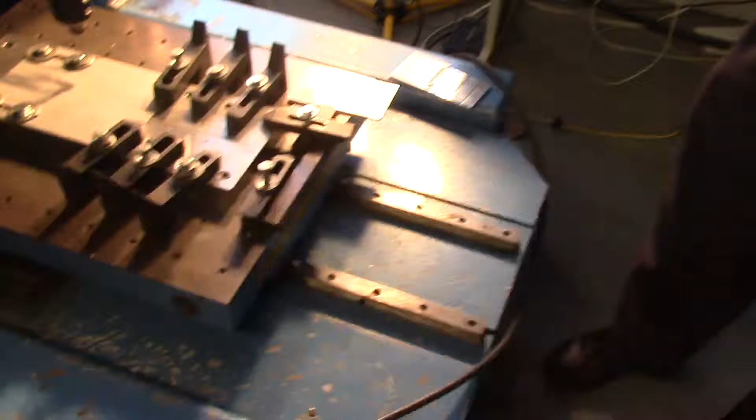The most important thing in the welding: you have to be sure that the center of the pin is the same as the center of the weld. How can we ensure that we put, set, or fix the workpiece or the test specimens in the same line as the center line of the pin or the tool?

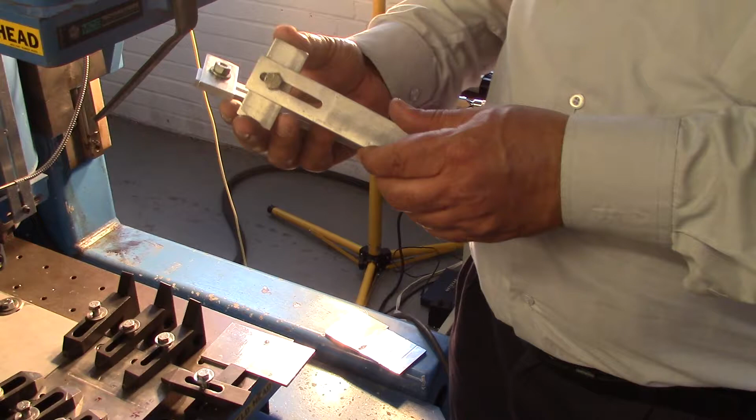Actually, we arranged to fabricate 2 jigs, flexible jigs. They can be moved by this bolt, and we adjust them with a distance. This distance will help us to put the workpiece in the same center line of the pin. We can do it now.

Also, we actually use a stopper here. This is the stopper, because the axial force is very high, and the fixtures will not be able to get a precise or adequate fixing force without putting some stopper. So the stopper will prevent the workpiece from moving along the welding direction.

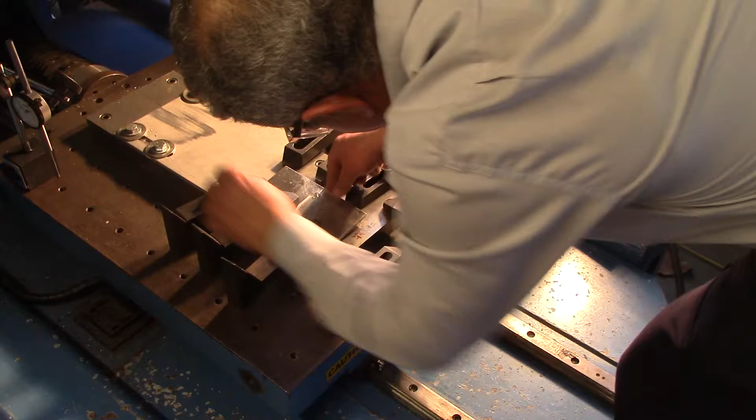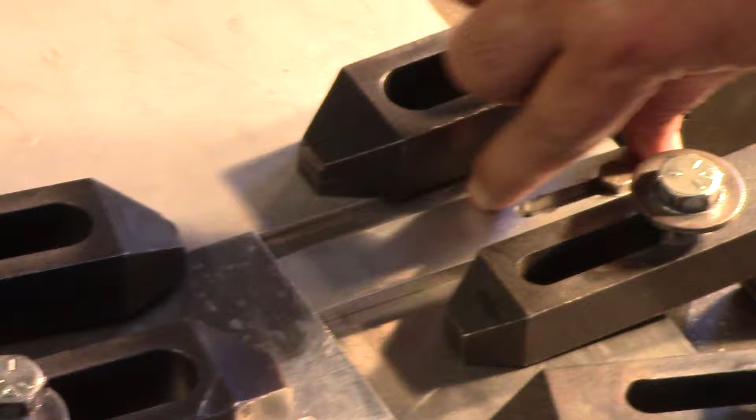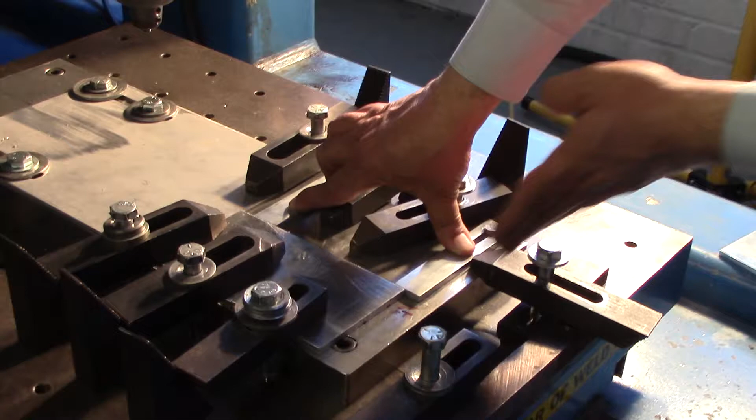You can see, you can put these 2 jigs here. They should be perpendicular with this face. This is the back face, and we have to put these 2 pieces together perpendicular to this. So we have to move this to be in touch with both jigs, and move the workpiece to be in touch with the stopper.

This is the correct position that will make sure this line is the same line as the center of the pin. Now we can go ahead with clamping.

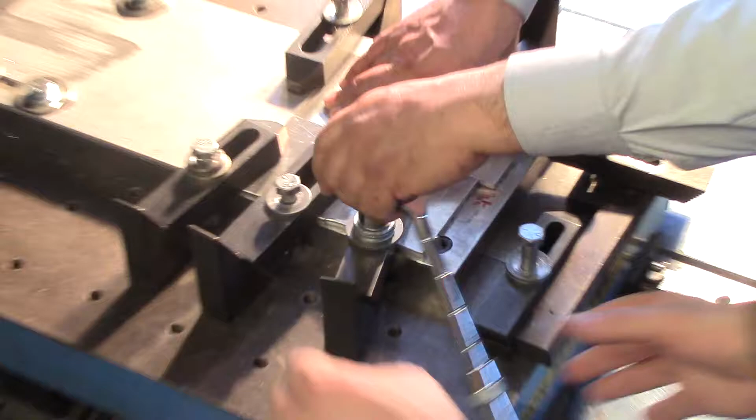Help there. Just let me see this. Do you want to... I need to move it. Yeah. Yes. Now? Yes. Oops. It's okay. I thought the one from there had moved actually, but this one.

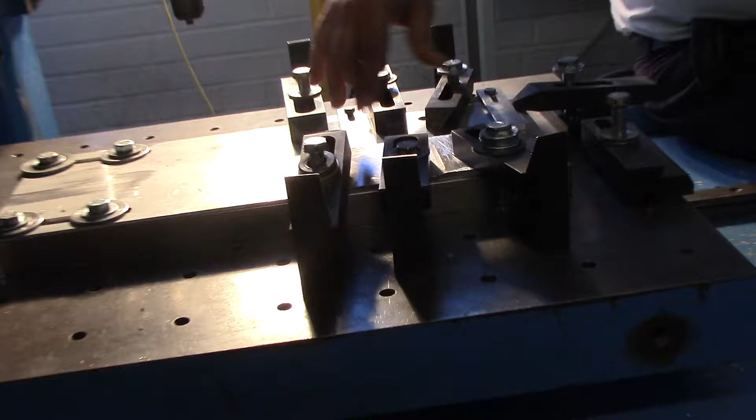So you can see the stopper thickness is less than the workpiece thickness. This is the advantage of the stopper. So we need to make a fixation on the workpiece and not fix the stopper.

Good? Yes. So you can use this. Yeah, it has a bunch of burrs. Oh, sorry. Oh, sorry.

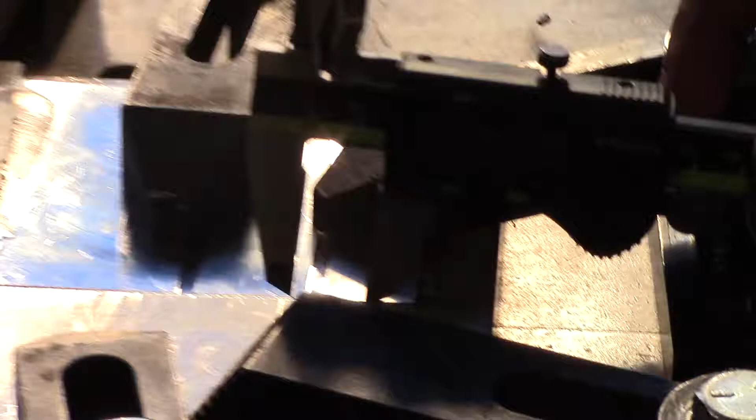So the start point is here, and we can see what travel we need. So it's 5.2 inch. Starting from this point, the travel will be 5.2 inch.

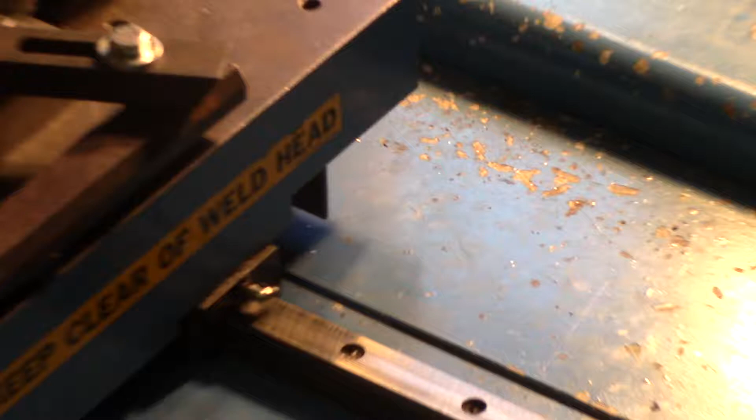The best thing for this, you have to do a test run with a safety margin. This is the first time we found this trick in order to use the friction stir welding in the air, or say a dry test. For the dry test, we have to make a trick on the machine. We have to give it the impression that the 0 point is not on the real surface.

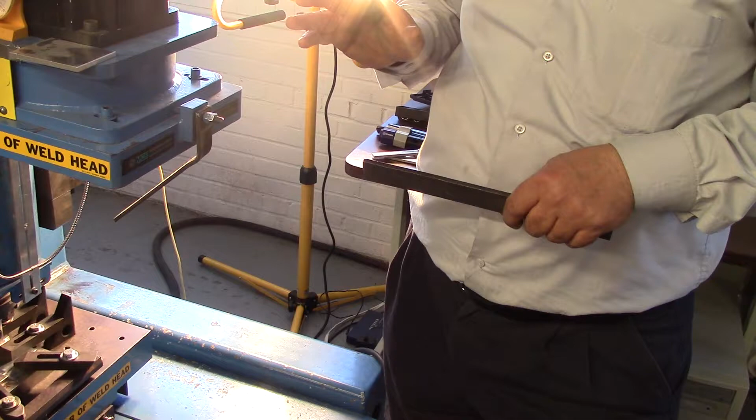So we have to put a spacer, then we make a 0 on the spacer, then we release the spacer, so the machine will get the impression that the 0 point is on this point, not on the real point. So we will be sure that all the tests will be done in the air without any interruption or anything unexpected during the welding, because we are not sure that the movements, the commands, are correct. So we have to be sure everything is correct by using a dry test.

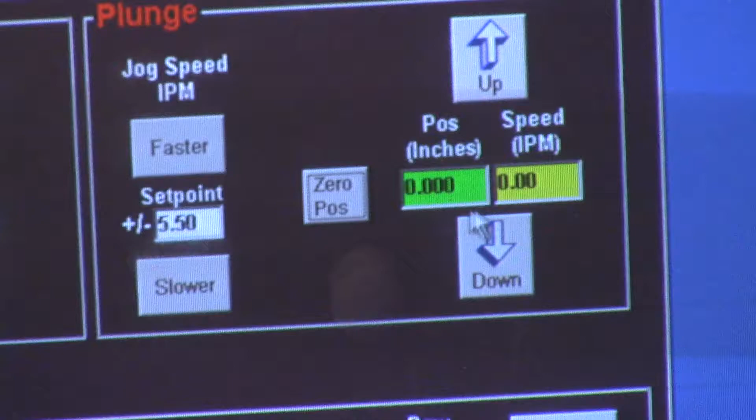Yeah, this is okay. So here we have to make a 0. To make a 0 for set point, you have to push 0. So the readings set to 0, and we have readings here, and we have to set it to 0 position. So we got a 0 as well. So we got a 0 for x-axis and z-axis.

Then, after finishing this step, we have to go to another step. This is a schedule sheet. What's the program name, job name, weld name? Let's say weld name is Hazen. April 11, 2004. So it will be okay. We have to select one of these and we make amendments on these templates. So I prepared this program previously with these movements. We can make edits.

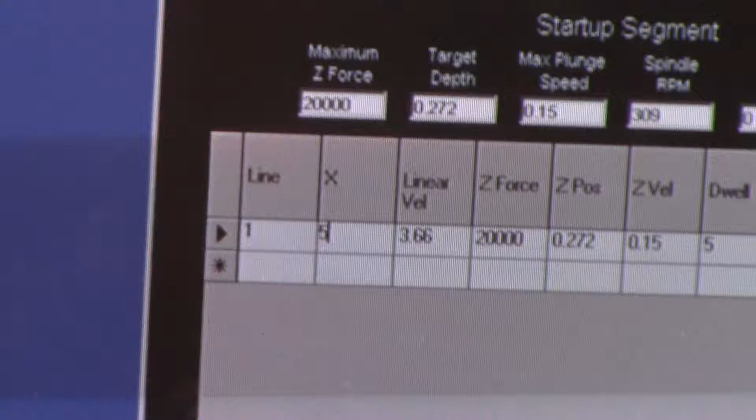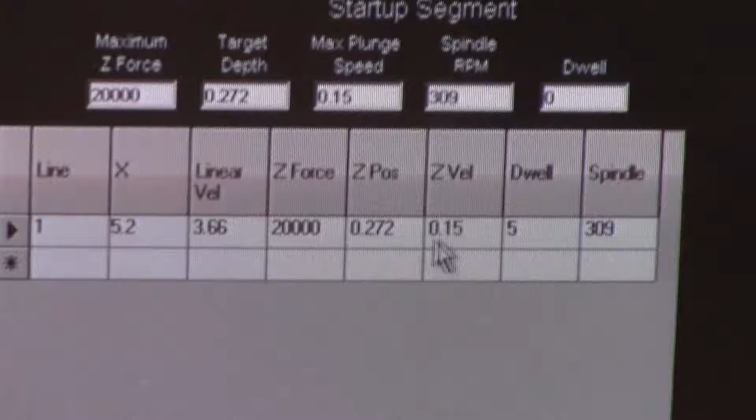So we got this screen. The travel axis now is 6.3. What is the inches? Yes, we measured it as... Is that the length of the weld? Yes, we measured it as 5.2. The linear velocity is 3.66 and Z position is 0.272 and Z velocity is 0.15.

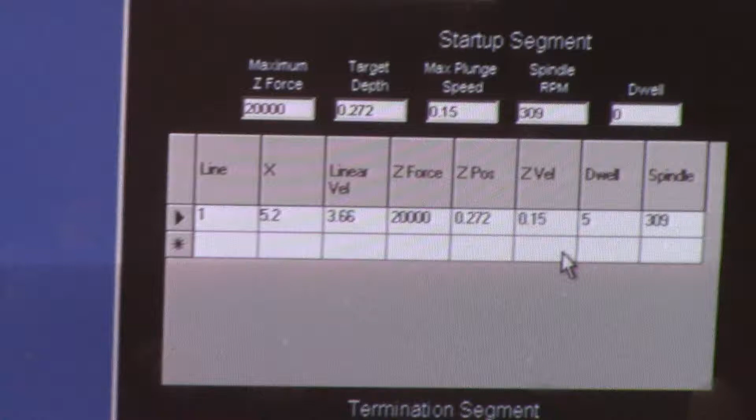Dwell time is... What is the Z position? The Z position is how much it's going to dive. Yes, yes. And the Z velocity is how fast it's going to do it. Is that inches per second or what is that? This is inch per minute. Yeah. And this is in seconds. As soon as we finish this step, the shoulder will only rotate without movement for 5 seconds before going ahead to the second step.

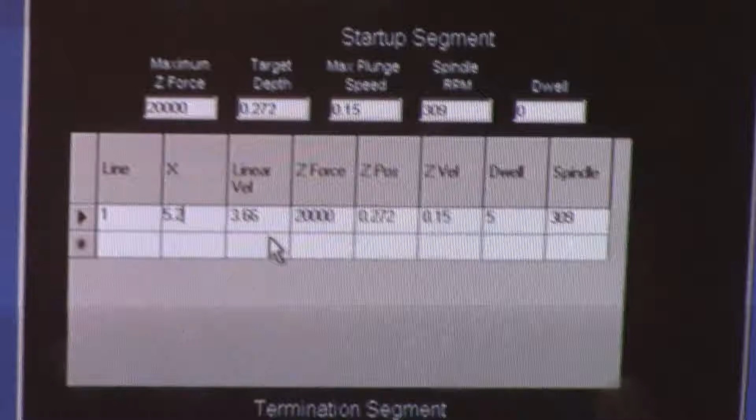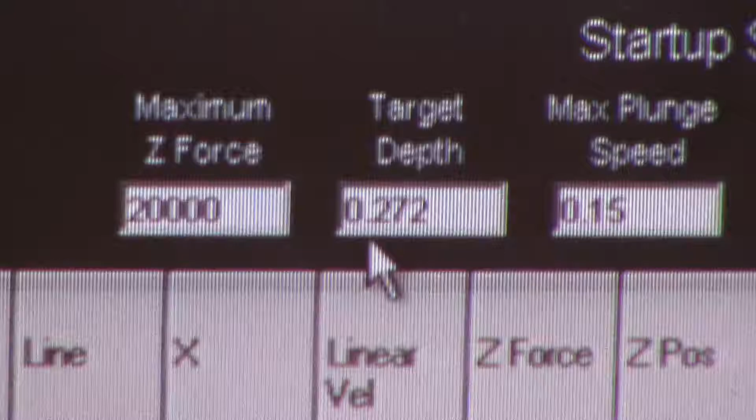This is the plunge step, or start-up segments. This is the maximum expected Z force. So it is measuring the force as well? Yes. And we have 0.272 and 0.15. The revolution per minute is 309. This is for the first start segment, and this is for a linear movement. And this is for the last or termination segment.

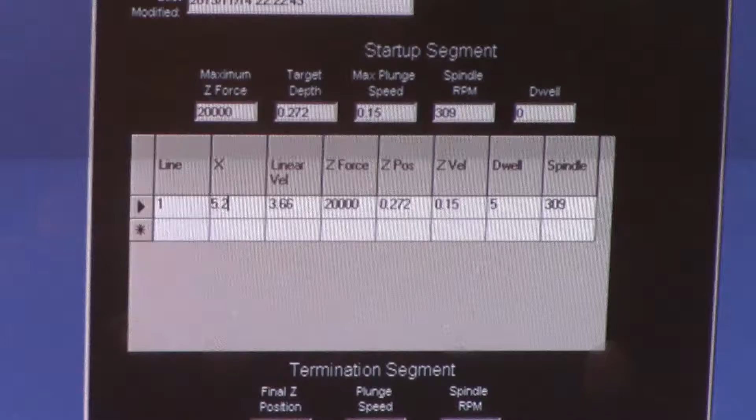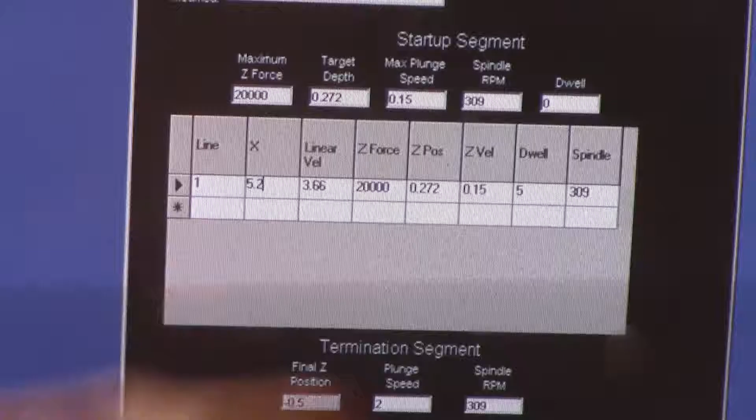Termination segment means the safety margin that we have to go after finishing the work. So this one is the plunge. Yes. This one is the linear movement. Yes. And then this is what it's going to do, which is probably lift up, right? Yes. So the plus sign means the movement will be downward after the 0 point. So this negative means it's going up. Yes. Got it. This is the direction.

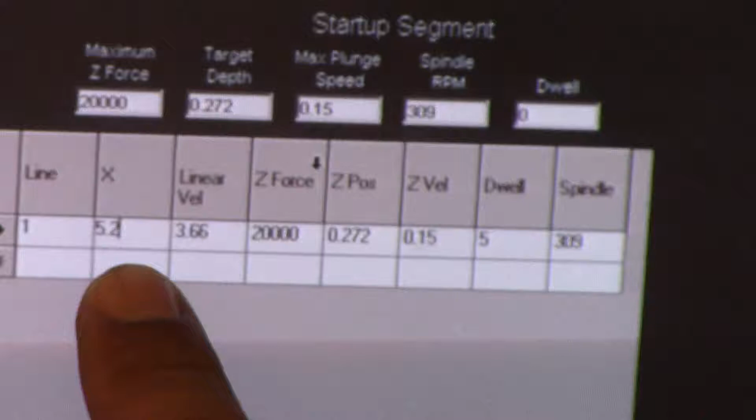Now we put this with some clearance. We set it as 0. Now we finish the update and we amend the movement to 5.2 and the plunge depth to 0.272. Then we have to push update. Now it is ready to go ahead with a weld.

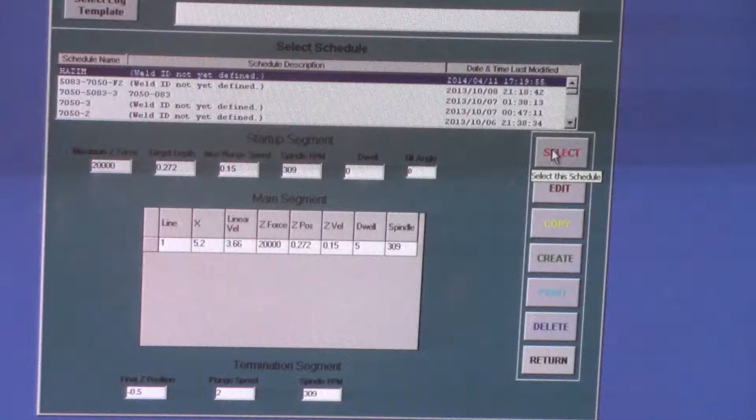If when you are doing the weld you find any problem, you can hit the red button, right? The stop. Here we can't, but in case it goes, yeah, we can. If there is a mistake, like you realize. Yes. So we finish the schedule, select, and then we go ahead to weld.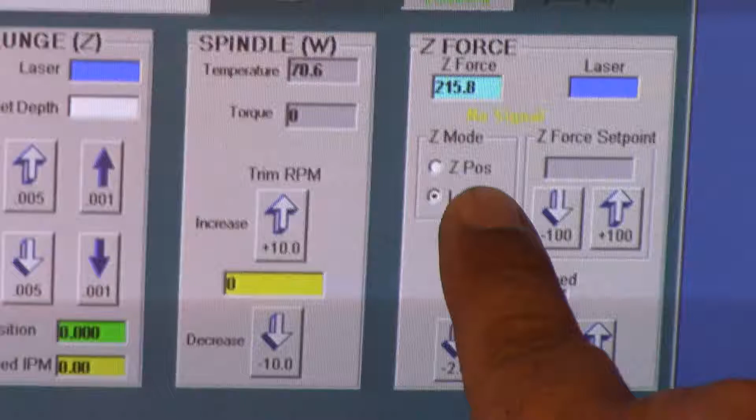For the weld, actually the first thing is that we have to make a 0 point, we have to be sure. We have two alternatives to go ahead with the 0 point. One is based on the laser sensor, which is available, but we didn't use it before. And we can go ahead with the Z position. With Z position, we have to move the tool very close to the workpiece. So now we suppose this distance as a workpiece.

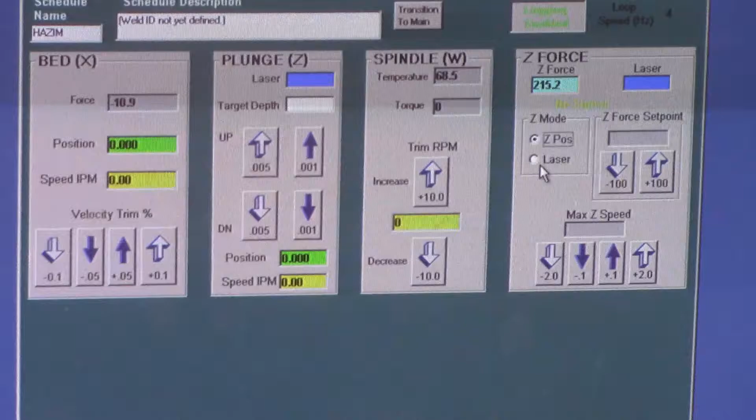And then we have to activate Z position instead of laser. This is very important to go ahead with the 0 point. Now press on 0. So you get a screen or alarm. This will move Z axis inward until force is detected. So this detection will be based on the actual touch between the tool pin and the workpiece. So we put this strip in order to give the impression that the workpiece top surface is on the top of the strip, to be sure that it will work in the air.

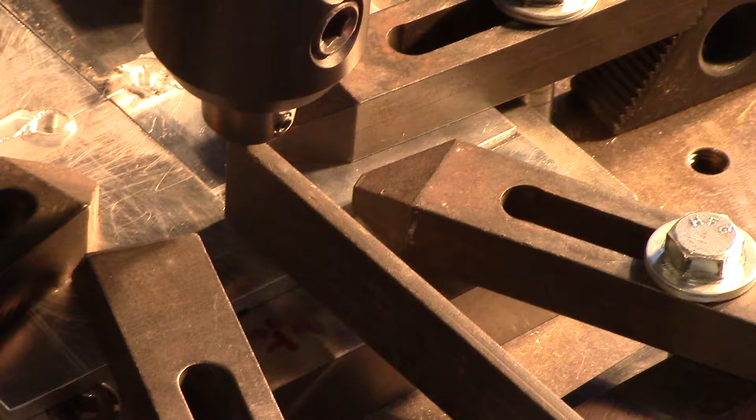Should be very close here, so we can release it very easy. When we push yes, you can see what the function will do here. It will move up first, and then move down until it gets the force. Now it will detect the force. The force is very low now.

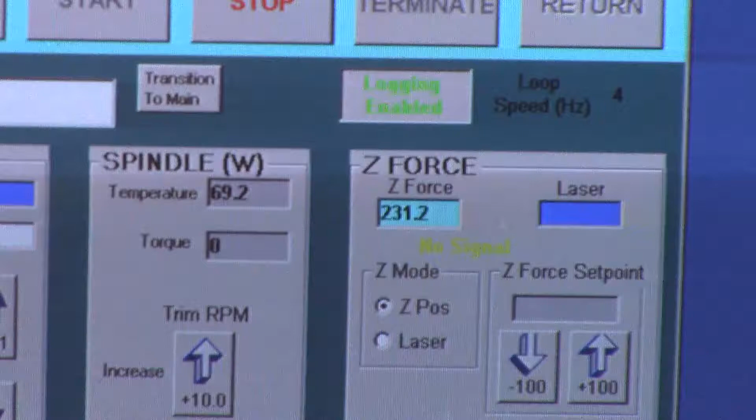So as soon as the pin touches this strip, the force will be increased. Now we have a very slow movement of the tool. Still have a gap because it moved. You can see. Yes, now it's okay.

Yeah, now it's going up. So it detects some force. This gives the impression to the machine that the pin now is in contact with some force with the workpiece. So it is okay. Now the machine is ready to start the program, but we have a strip here. We have to release the strip.

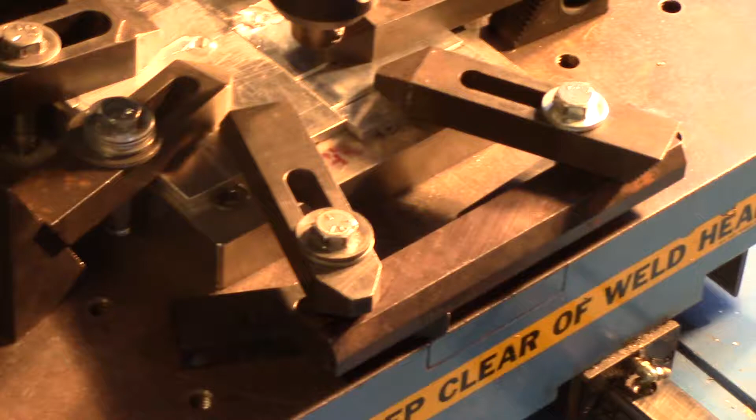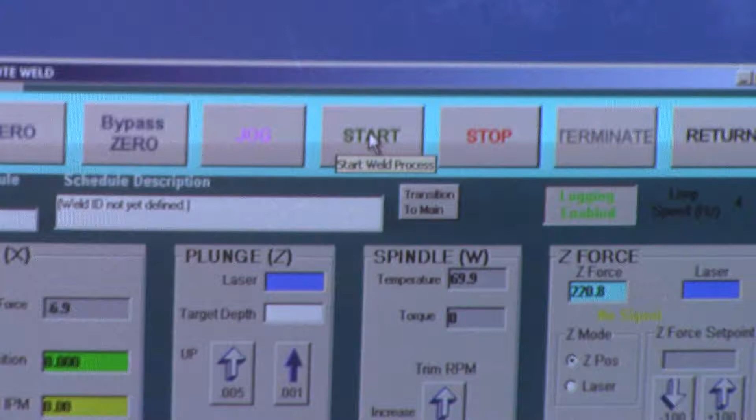So from this 0 point, the machine will go ahead with the Z-axis that we programmed. From this, the machine now considers this is the 0 point. We have to start the program. We just push on this, and we can see what happens. So the machine starts.

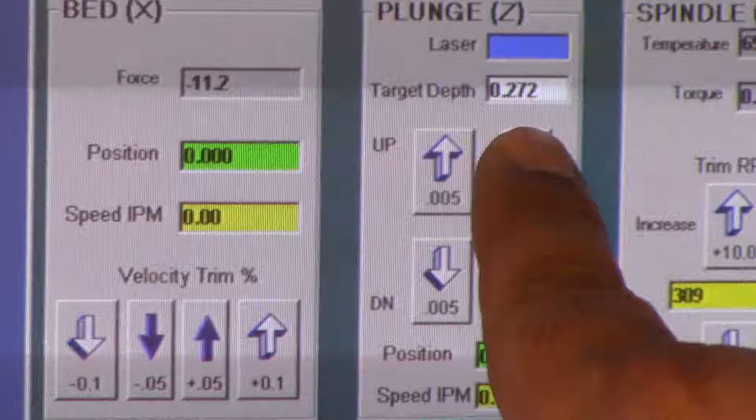And this is first, the target depth is 0.272. This is the target depth. So the machine will go ahead in a plunge until the actual position matches the target position or target depth. Then the machine will make some dwell for 5 seconds as we used. Then it will go ahead to the next step, which belongs to the linear movement.

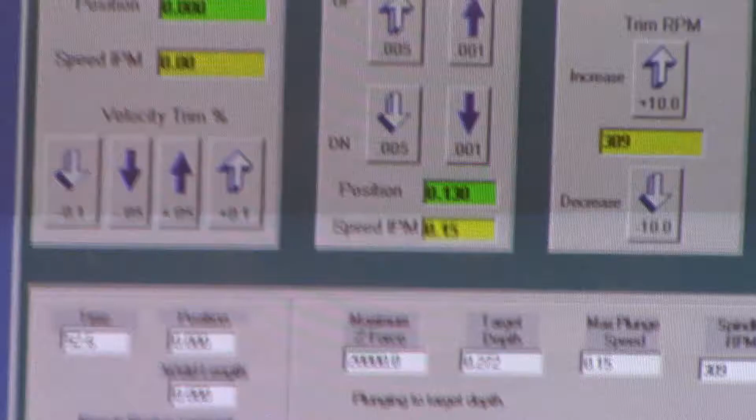You can see these are the instructions of the plunge force. So in case of any accident, we can just push stop, and the machine will be stopped. In case of some emergency, you can push this emergency button to be sure that everything will be stopped.

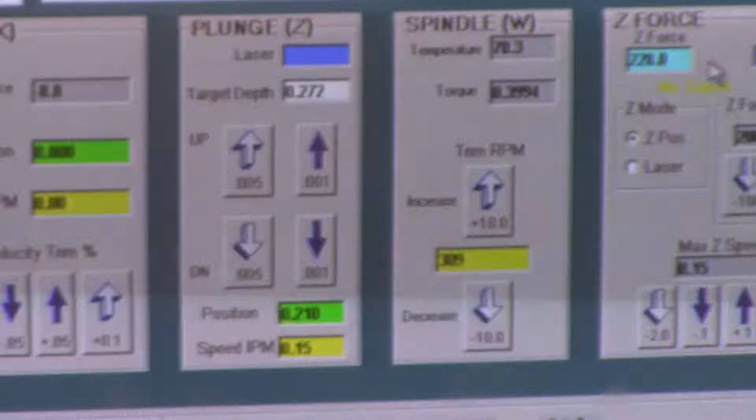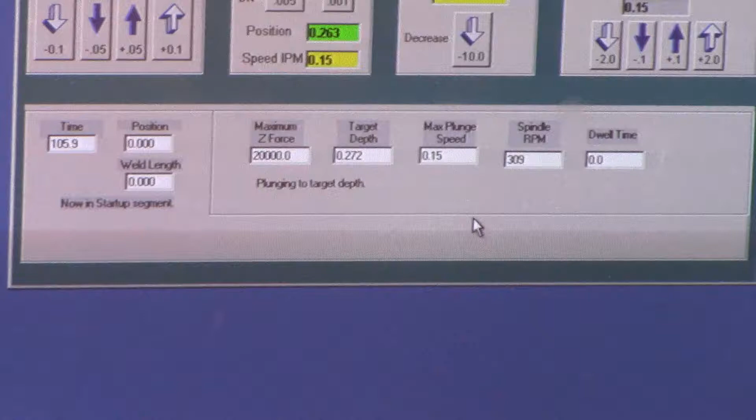We have here Z force detection and X force detection, as well as torque. You can get readings of the torque on the bed and on the head. Now it moves. You can see the movement in the x-axis. It's finished. The depth limit 0.27 and the target was 0.27, the same. Then the next step is to go ahead with the linear movement, which is named travel movement.

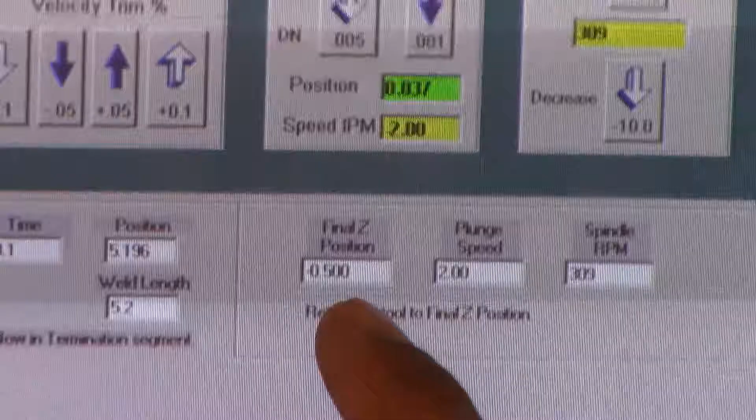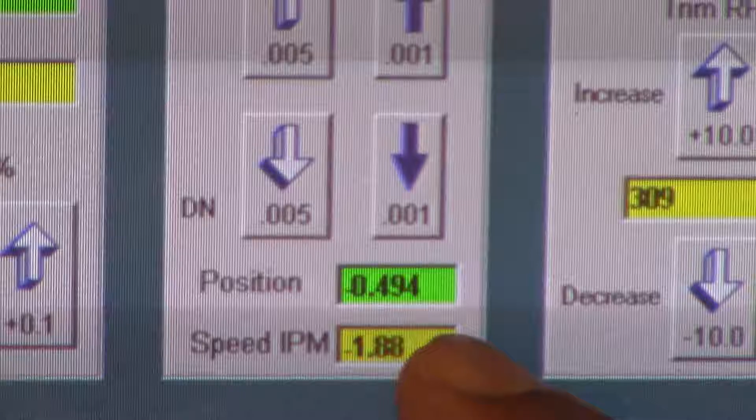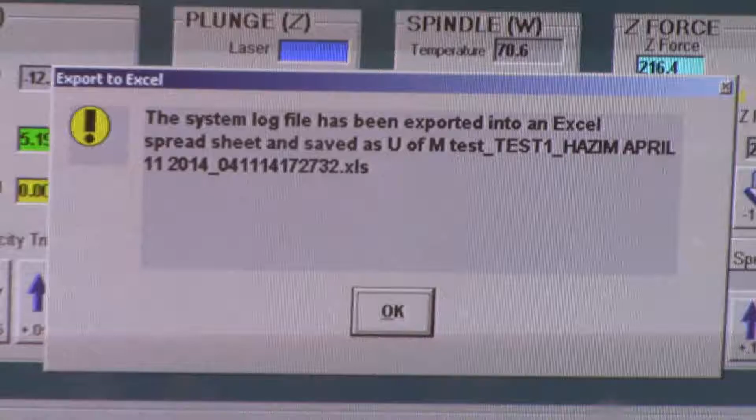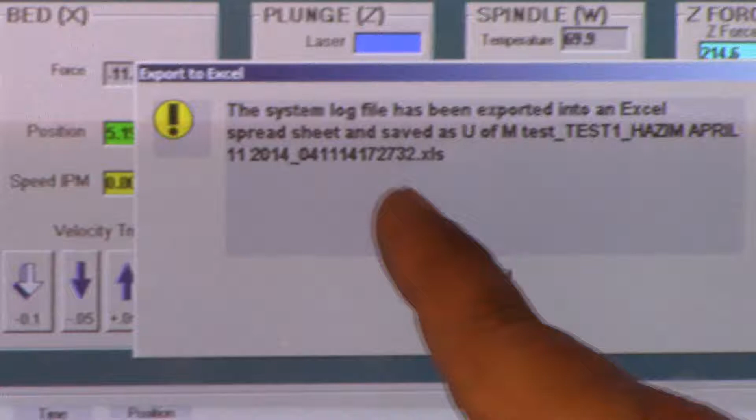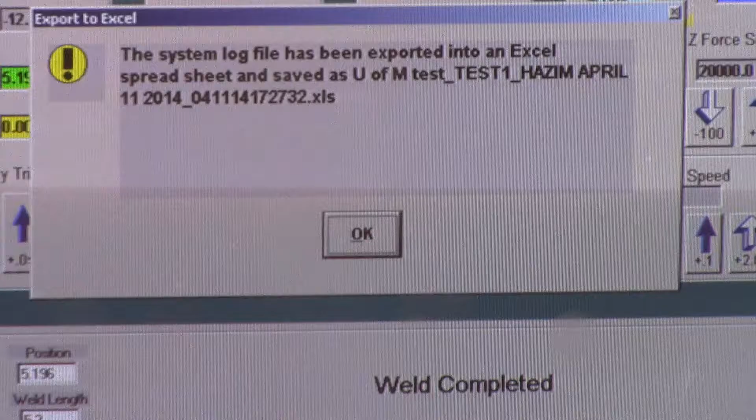Now we got this message: the system log file has been exported into an Excel spreadsheet and saved as U of M test 1 Hazim April 11, 2014. This is the name of the file, which includes all instructions, including movements, forces, and torques. You can go ahead to see this file.

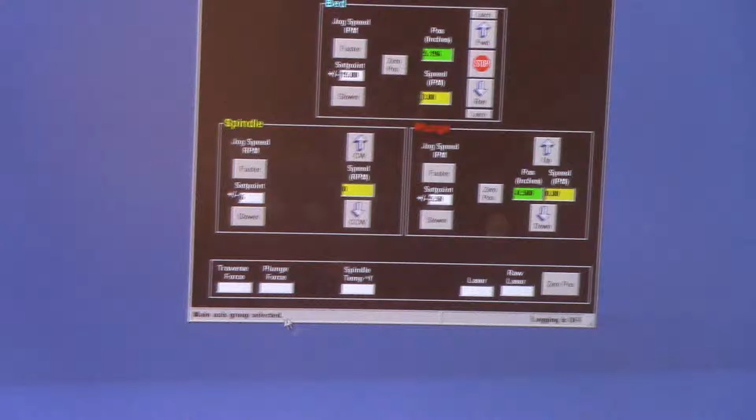So now we have to push return. It is okay. You can move the machine again up and return to the start point. Change the feed of the Z to 1 because it is very close. That's to go slow, right? Yes.

You can see it is very close. In case it is very close, we have to put some safety margin between. You might want to see it this way so you can see how much the space is. Lower the camera. Let's see. You can put it down there.

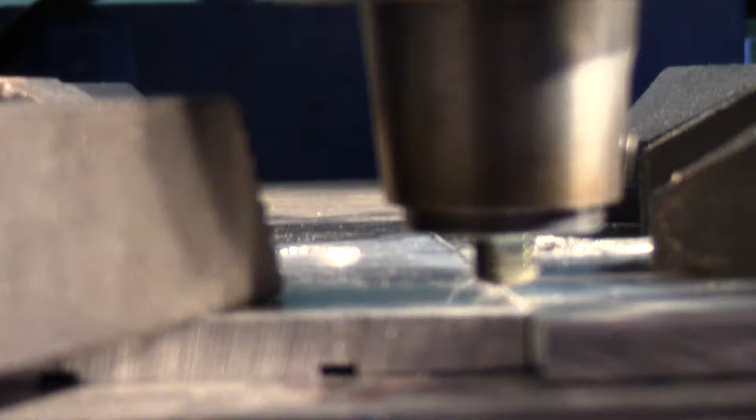Now you get it instead of using the zoom. Can you get the zoom on? Because the camera is not very good at getting that. Okay, this distance is okay, but we have to move the tool in x-axis. Also at low speed. Yeah, it auto adjusts when you zoom in after a while. The other way actually. There you go. Sometimes if it is too far off, it takes a while. There you go. If you do it little by little, you can get better.